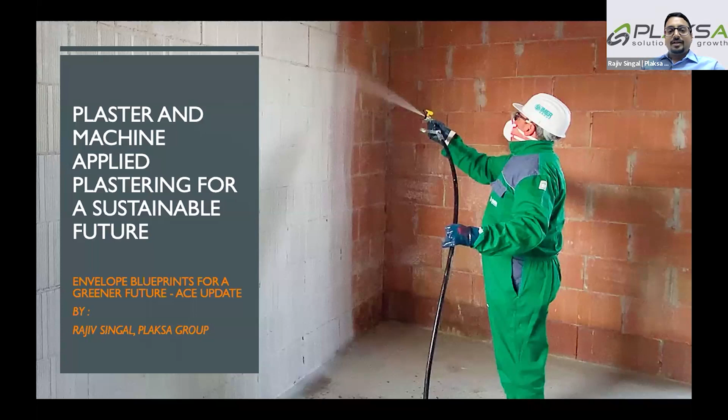So let's welcome Rajiv. Thank you so much, Vinisha, for such a wonderful introduction. Given the paucity of time, I would right away jump into the presentation. While I bring in the presentation online, I would like to thank all the esteemed panelists, because what they have presented today is absolutely essential for a sustainable future. As Dr. Nilesh said, whatever we have inherited is actually not our right, but it is a loan that we have from our kids and their kids, from our grandchildren and their children, because we have to leave this planet to them to live in.

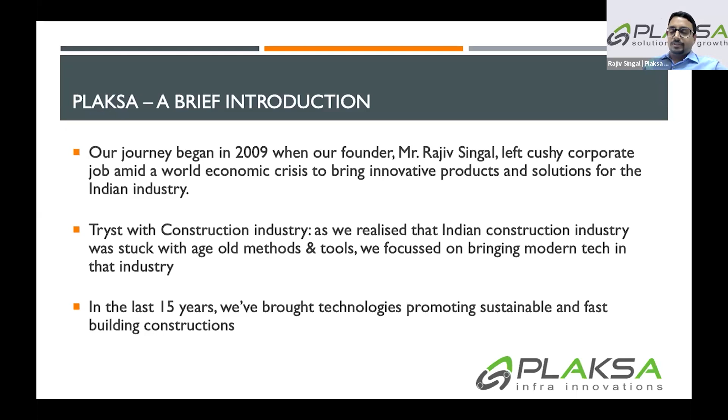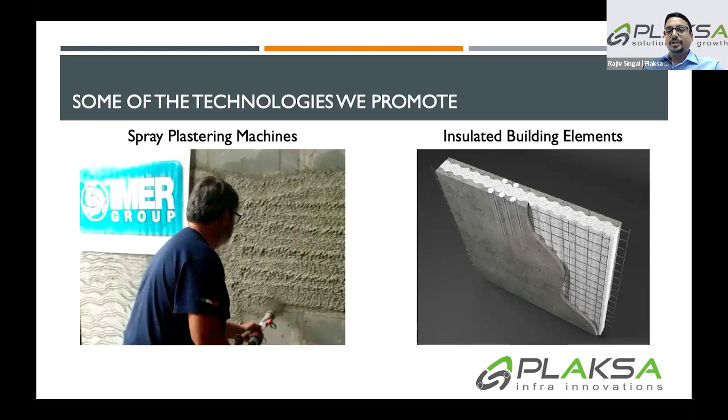I'll briefly present. We as a company have been existing since 2009, and we have introduced a lot of different innovative technologies, focusing on sustainable and efficient use of energy. Some of the technologies we are promoting in India include machine applied plastering, which I will be covering today, and also insulated building.

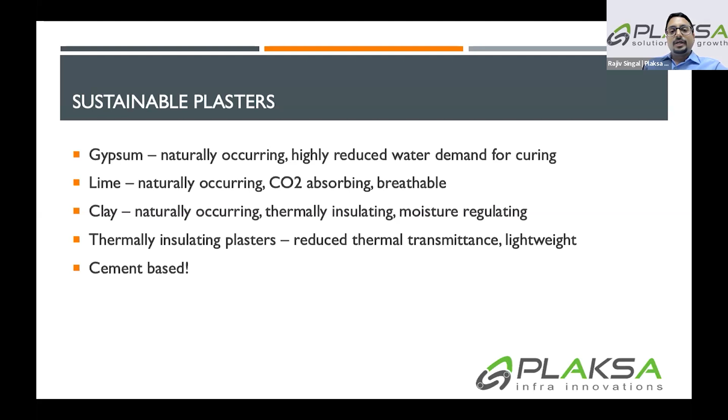Jumping into the presentation, when we say sustainable plasters, everybody knows plaster, it's omnipresent. But when we say sustainable plaster, some people talk about gypsum, which is naturally occurring with reduced water demand for curing, or lime, which is naturally occurring but also CO2 absorbing, clay, which is both naturally occurring and thermally insulating, and then thermally insulating plasters, which reduce thermal transmittance, are lighter weight, and improve energy efficiency. But let's not forget the cement-based plaster we have known for the last 100 years or so - yes, they are also sustainable. I will delve into why and how.

Before we delve into why plaster and what we mean by plaster, let's have a brief history of plaster. The very first plasters were earthen, simple mixtures of clay with sand and some straw. They required no furnaces and could be dried easily. That was the first, because that material was easily available to mankind - we're talking 10,000 years ago, when we started agriculture and started building roads.

Then Egyptians and Greeks discovered the use of gypsum and lime for plastering. They had fire kilns made with gypsum or lime, and due to the extreme temperatures, these became a powder. They doused this powder with water, and it quickly hardened. That is how lime and gypsum plastering came into play - this is over 2,000 years ago. We're not talking about something very recent.

Then the Romans discovered hydraulic lime and the addition of pozzolans, and we all attribute concrete to the Roman heritage - it's something left over by the Romans. As cement was discovered, the superior strength and hardness of cement plaster was the key factor why it was promoted and why it got so promulgated into the world. So while the materials and tools advanced, the essence of plastering remains rooted in its ability to strengthen and protect the structures.

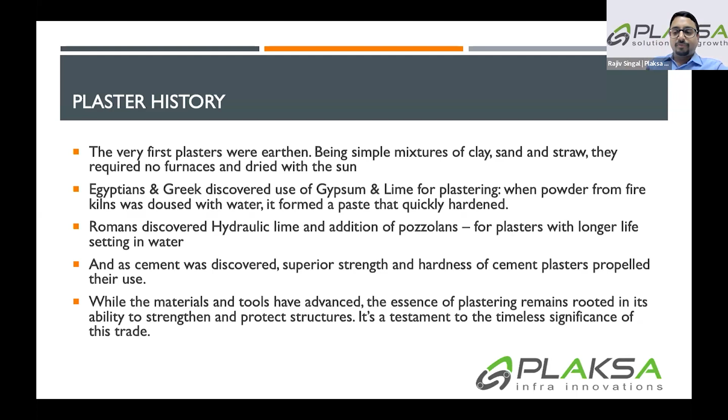That is the basic element and premise of why we use plasters. So, the role of plasters in structures - we have seen this before as well. The role is, first and foremost from an architectural point of view, the aesthetics, the ornamental aspect - it was used as an ornamental element for centuries, and also helped in cultural representation. Whether it was the White House, churches, or even the Parliament House, plaster has been used extensively for such representations, and also for protection from elements such as rain, fire, heat, etc.

The English mandated plaster for fire protection in the 13th century when a fire broke out around the Thames River. Plasters protect building structures from molds and mildew, and from physical damages, whatever you can say. It's the first level of protection, as Dr. Nilesh said before in his talk, it's the skin of the building. Plaster is the basic skin of the building, which protects the inside from all the different elements.

Insulation - sometimes people use plasters that are thermally insulated, acoustic insulated, or fire protection plaster. That is also one of the roles. Plaster, in a sense, with all these three things, is increasing the life of the building and calls for lower maintenance.

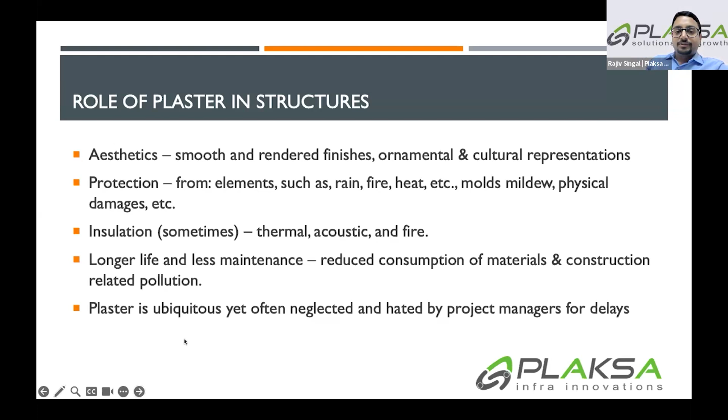So we are saying: reduce consumption of materials and construction-related pollution. As I mentioned earlier, plaster is ubiquitous, yet it is often neglected and hated by project managers. So now we have seen plasters as such, what role they are playing in the building envelope.

We come to machine-applied plasters, as I mentioned before during the talk. They are 10 to 25% lighter, so that means you reduce the material consumption for your building. They require little or no curing, so that means you reduce water consumption, which is a scarce resource as is.

They call for better adhesion, so the building has a longer life and requires less maintenance. Dust suppressing means reduced emission at the time of construction. And they also have what we call energy-efficient material lifting.

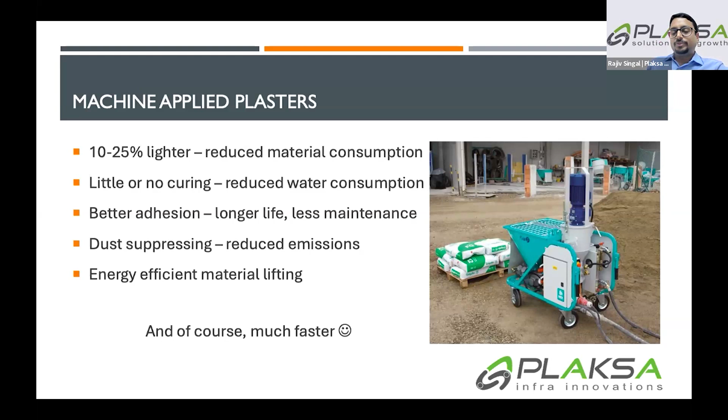In normal building construction, if you're lifting material like sand, you use all those big frames and heavy elements. The energy consumed in those kinds of lifting arrangements or systems is 4 to 5 times what can be used through these machines. So you reduce your energy consumption dramatically, and of course they're much faster.

So when it comes to selecting plasters for a sustainable future, it has to be selected on two parameters in general. One is as per local conditions - you require breathable plasters such as lime plasters for areas with high moisture, especially coastal areas. And you may want thermally insulating or regulating plasters for areas with high temperature variation, for example Delhi or the central plains.

And as per application as well, you would go for gypsum or clay plasters for internal applications, but you would go for lime and cement plasters for external.

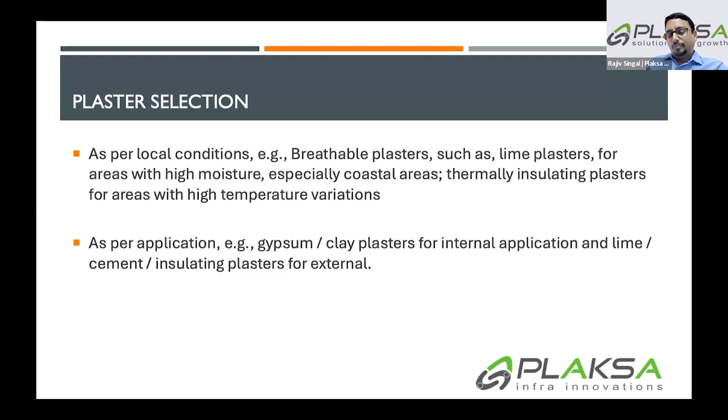Overall, more than anything else, the main idea of my discussion is that plasters enhance the life of the building, the durability of the building. And the longer the durability of the building, the longer the life of the building, the less construction you require to do through the decades. As we all know, we need to build a new India in the next 30 years. So if we are able to increase the life of our buildings, that's number one.

Number two, repurpose the buildings. One very good example of repurposing is probably the Bombay Exhibition Center in Goregaon, Mumbai - it was a factory which has been repurposed as an exhibition center. Repurposing the building, reusing the building.

So we have this for environmental sustainable goals: reduce, reuse, recycle. If we focus on the first two parameters instead of just recycling - to reduce and then to reuse. Reuse means repurposing the building, creating building envelopes which are smaller yet sustainable for people and offer good living conditions.

One good resource to go for that is the YouTuber Never Too Small, coming from Australia. Over the last decade or so they've done hundreds of episodes on how you can get people, the younger generation, closer to the city center or closer to the areas where they're working, instead of sending them 50, 40, or 80 kilometers away, living in the suburbs and spending time in transportation.